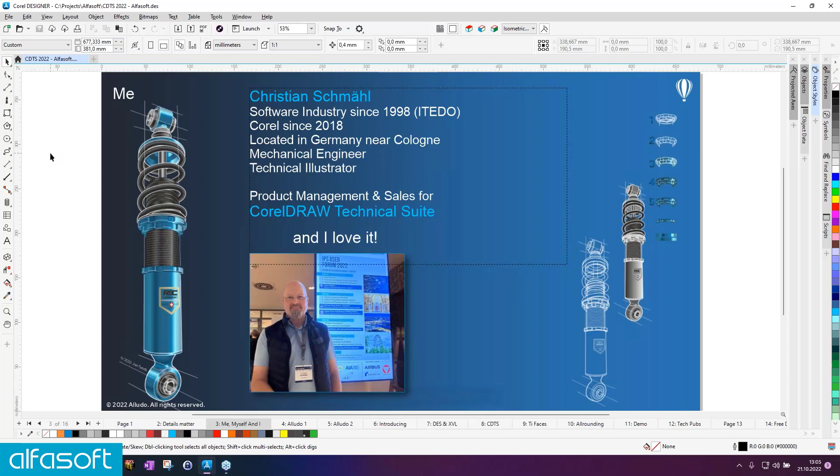As you can see, I love it, and it's really fun. That photo was taken, I think, last Monday. I just tonight came back from the IPS user conference, user forum in Vienna, where it was all about S1000D, where we are also very involved, and where specific requirements for illustrations are there. I had some really nice contacts, and I'm currently catching up with all those - it was really fruitful, and I'm looking forward to the next conference in this era.

First of all, before we go ahead, there might be some confusion. The company Corel is a wide word. People and users tend to say, I'm working with Corel - that's actually the company name. When you're working with Corel, you're actually working with Corel Draw or Corel Designer or whatever. That's a wide term. By the way, the name Corel is the abbreviation of Cowpland Research Laboratory, so it's an artificial combination.

Since we are revamping a lot of stuff, and there's a lot of movement in the company, we have new leaders and a lot of changes for the employees. They changed a lot to the even better - so we have a better work-life balance now and all that stuff. And what we figured out, since we have different brands in our company - we have WinZip, Parallels Desktop, and Mind Manager, and the CorelDraw family, which is the graphics.

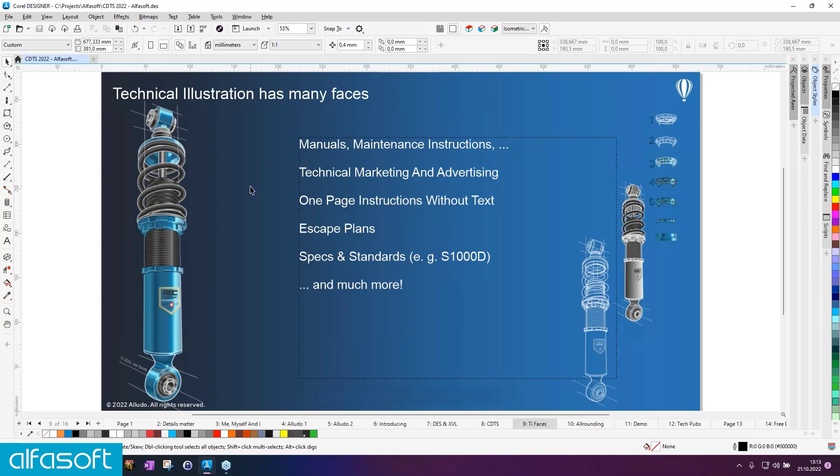And the idea behind the Technical Suite is that you have one solution package that enables you to create all of those illustrations, no matter if this is this color thing here or just a sign with an arrow on it or whatever. In essence, this means you have the concentration of all this technical communication in one package, and you don't have dozens of different formats where you need an application here, an application there. There's one package that gives you everything, and this is where it all comes together. That's our idea behind that.

So today the illustration situation is quite different than in the past. I think we all know that, I'm just having this here to be complete. In the past, we had technical writers doing all the text, and they went over to the technical illustrator and said, hey, I need one of those fancy illustrations because I want to visualize what I'm writing there. And then they created a combination of an illustration and the text, and that was the deal. So what's the situation today?

Today these technical illustrators, unfortunately, are fading away, and that led in the direction of the so-called all-rounder, which is actually the technical writer who has to do his illustrations by himself. And we like to give him the toolbox that enables him to make his life easier.

And this is again where it starts with CAD files and engineering data, so it's not up to the writer to create parallel perspective and all the stuff from scratch. So it's an easy entry, and it's a good thing.

So coming back now, grabbing CAD data is very easy here. You say 3D import, and then the XVL Studio, which was added to this graphic suite making it the technical suite, is started. This is your entrance into the 3D world.

Here it begins. Usually a majority of our customers, before they talk to us, tell us they have a process where they go over to the engineer and say, could you please take your CAD system and turn something like this and this, and then export it for me so I can take it from the server and work on it. That's nice, but it's actually time consuming for the engineer, and he cannot always immediately do that. After a while, he's probably quite annoyed doing that for you.

So the solution would be that you have your own CAD system, which is really overwhelming for somebody dealing with technical documentation. So here's the solution. This is simple, is powerful, and gives you the ability to grab the CAD data yourself and then convert it to your illustrations without annoying the engineer.

So if we open a file here, I have one file pre-converted, since sometimes when we import native CAD data, I don't know why, but when we are remote showing this, sometimes it takes longer than expected. So it's pre-converted. Actually, usually you have all these CAD formats here, and it depends what you're working with.

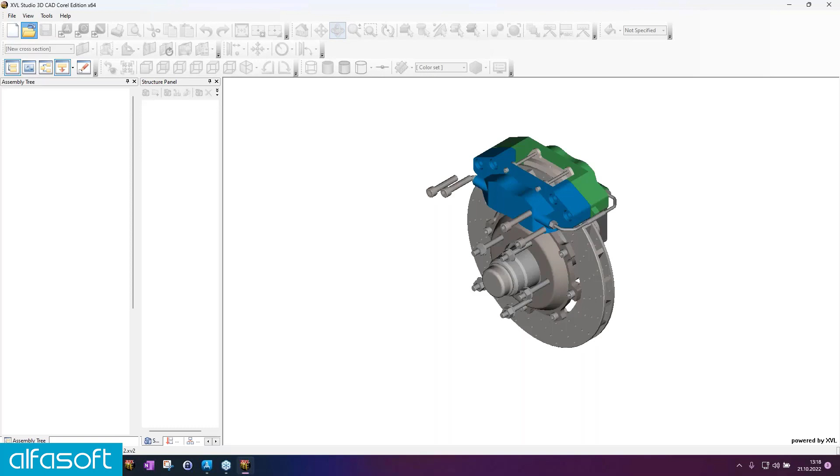Okay, so let's open this 3D file. Here it is, and I already worked a bit with it. For those who don't know, this solution has on the left an assembly structure that you can use to access the parts, which is very good when you know the names.

So you can say, okay, caliper, here it is, and then you can highlight this in your illustration. You can whirl the stuff around, just having a look here, examining it a little bit. It's just 3D data, and you can make some stuff invisible, visible, and so on. So you can examine and explore your data and figure out what you want to show in your illustration, where you've already written the text for.

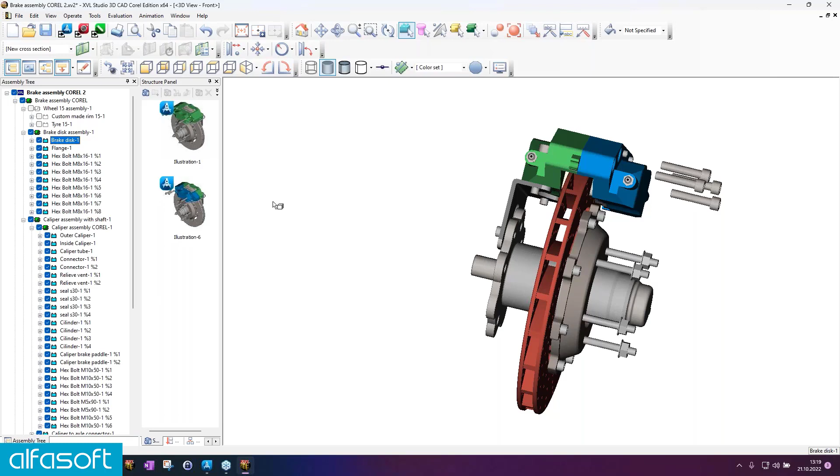If you want to go back to your initial view, you can double click the snapshot, which you can create whenever you want. So when you have different situations you want to write about in your documentation, you can create all these different snapshots and say, okay, this assembly procedure is like this and this, and then switch between these snapshots and just move them over.

Moving over, how does it look? So let's do what we've seen already, let's try to get a better view quality here. So we're doing this, what we have seen in the document already.

I have arranged everything like, okay, yeah, I want to show this situation here, and I want to move this over to my document in Designer. And there in Designer, I want to add some more things, like maybe a hand or a logo and stuff, everything I need to make this a high professional technical illustration.

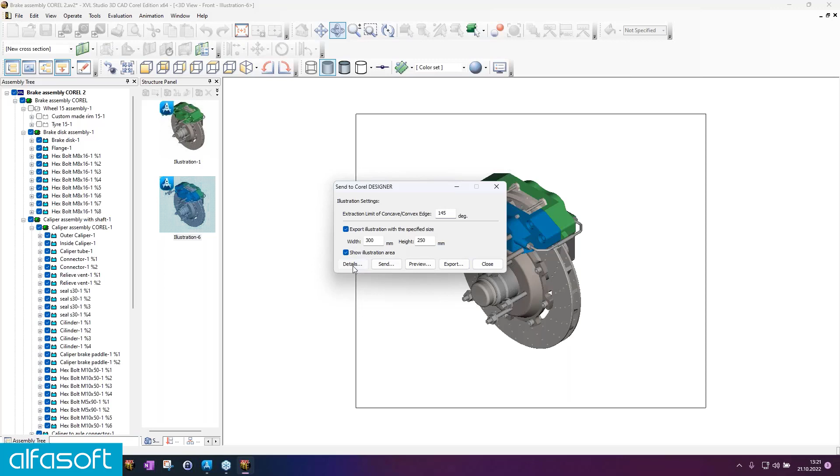The good thing, and this is the most interesting part, is you can enter your values for the thick and thin lines, and these are later created automatically in the color you want, or whatever, and then you can move this over. If you have repeating settings that you need, you can also save those settings, and then everything is set up as you like it, and that's it.

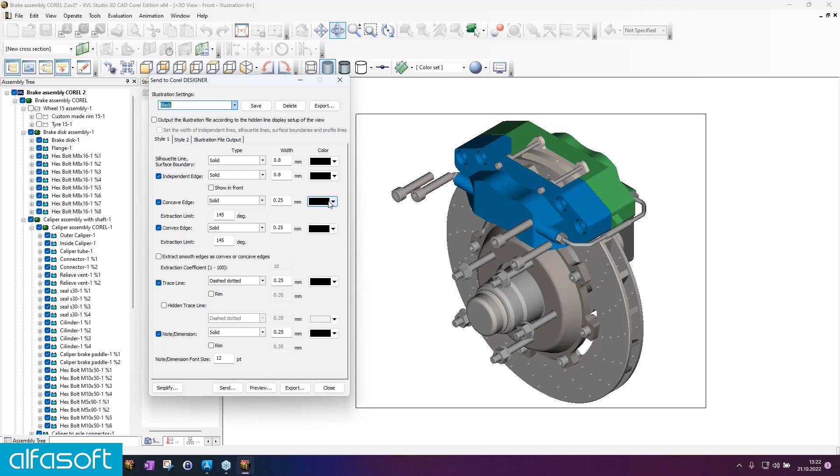There's a little frame around this where you can enter the frame dimensions. So when later in my document I have a box of 300 by 250 millimeters, you can adjust it here and move it over, and then it fits immediately without scaling. So let's do this, it's quite simple. You click off Send, and then all the magic happens in the background.

All the color is removed in this scenario here. Thick and thin lines are created, and later on we will see that it's moved over to Corel Designer, if everything works properly, I hope. Okay, so here we go.

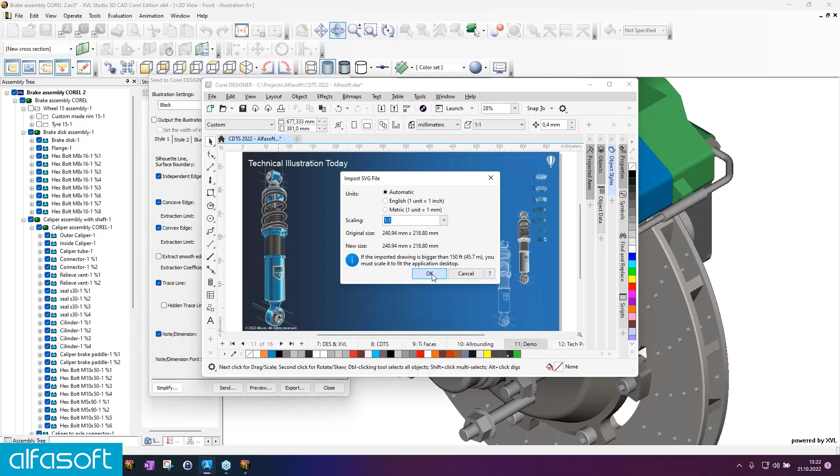The import process is done. You can see our intermediate format is SVG, not the worst. You can just click or drag a little box, and here we go. So that's in there, and here you can start further working on this, like say we are adding a thread.

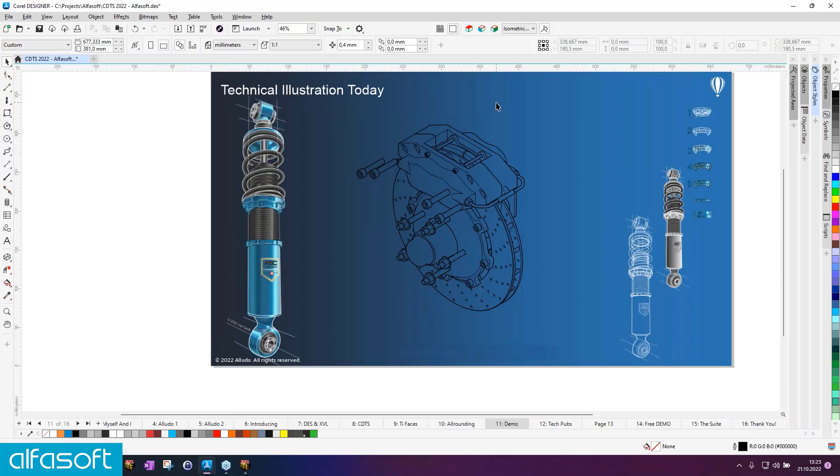For that, you can switch around here. If we go a little bit back, I can show you, I switch on the grid, and when I draw something, just as a little introduction, here's the magic rectangle. And if I now switch around here like this, I can switch the designer to parallel perspective, and I'm working on the colored blue arrow here. When I draw the same rectangle, it automatically fits to the parallel perspective.

The good thing is, when I enter dimensions here, it's not the distorted rectangle where you get the dimensions, it's the true dimensions. When I say I want this to be 40 by 40, then it's really 40 by 40. And this is the same as having this 40 by 40.

Okay, I'm doing this as well. So this is 40 by 40 in the flat dimensions, and this is in perspective. So you're working in perspective. You see this while I'm not in the flat perspective, there are different values because I'm not in the same system. If I switch it around where the system fits, then I have 40 by 40 again. So there's no need to sit and calculate what the distorted values are. Designer switches automatically, and that's the good stuff. So you have a graphics program, and when you need it, you switch to the perspective.

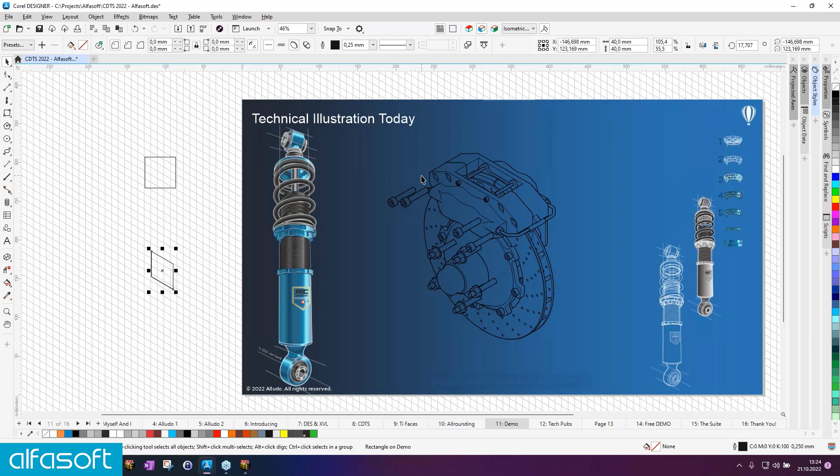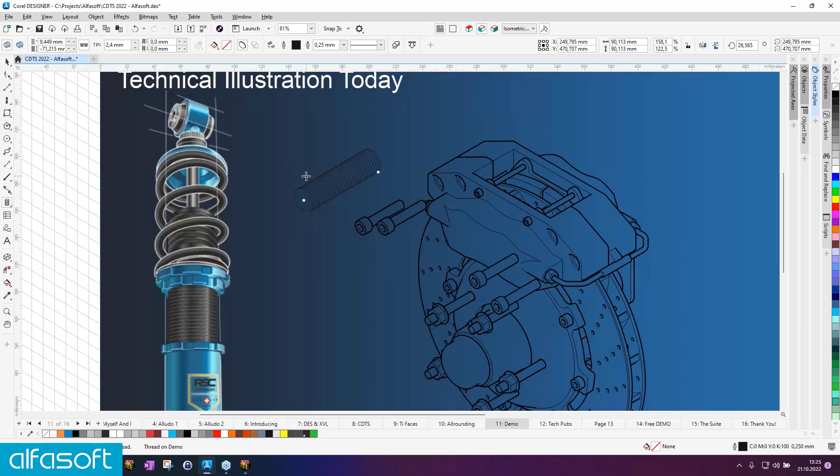Okay, so we are in this perspective now, and if I want, I can add something like a thread. Let's say we're doing it in that way, just so you see the thread. Okay, it's very fine, so we can adjust it here and so on. You can also enter the values of the length and stuff.

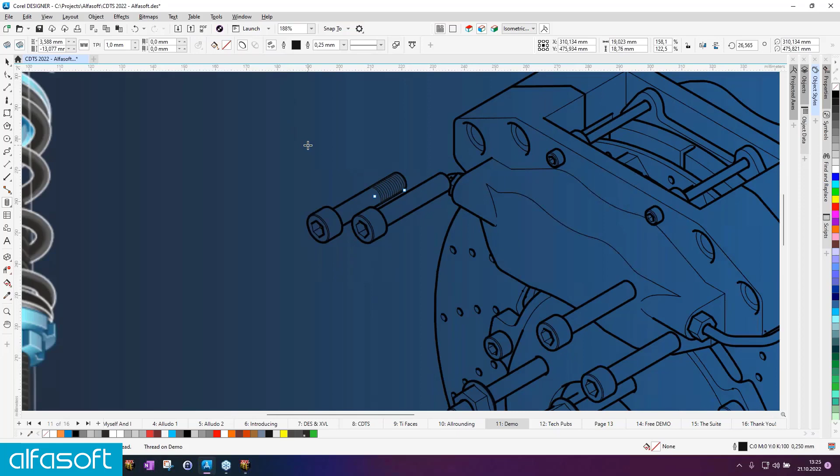But what we want to do now is apply it to this thread here. So we're taking the variant of that tool and say we want to go from here to here, and we just move it over. Then it's inside, and there are some ugly lines around that, so we switch them off. So that users can see this better, we make this bigger here, that value. And since this is a graphics program and not a CAD system, I can just, with Control D, duplicate this and put the same here as well. So it snaps there, and that's it.

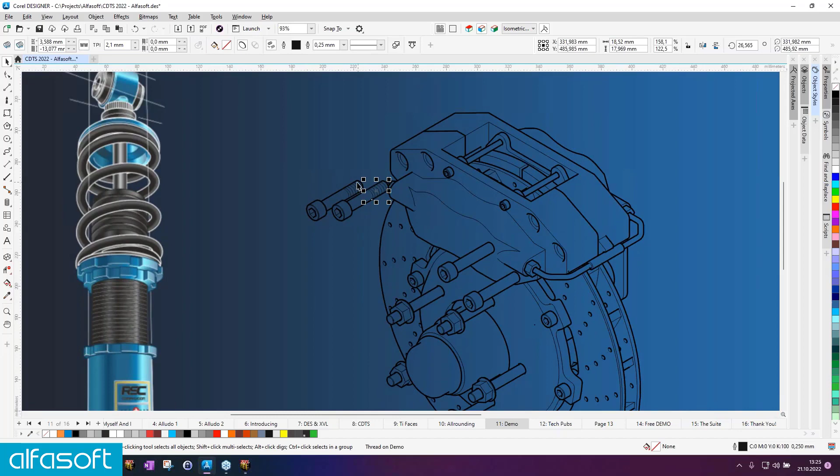Usually when you convert CAD data, details like this are missing, so you can mock this up a bit, so you can tell the people at home, look at this, that looks like a thread, and this is what you're supposed to find in the accessories box or whatever.

It's not only necessary to tweak the CAD data before you import it, it's also very important because you are responsible that your customers understand what you want to tell them. If you're causing a dangerous situation, then you might be in conflict with the law or whatever. So every documentation that you provide to your customers needs to be watertight in that meaning. It's not just drawing a picture, it's instruction, technical instruction, where you are held responsible.

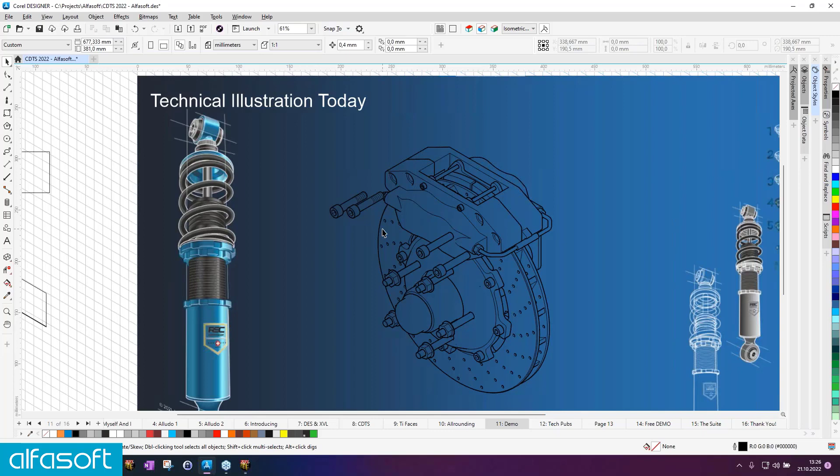But let's stay further with the all-rounder. Let's switch these things away, I'm scaling that and moving it aside. As I said, the all-rounder is not really an illustrator, so everything he or she can do in this other system to move the stuff over is better, since it's the so-called low-hanging fruit. And I would appreciate that myself if everything would be nice and easy.

So if we're going back to this 3D thing now, we see when we move this over, there is a new snapshot created. In this case, it's the same as this, but when we change something now and move a new version over, then this is reflected by a new snapshot as well. So let's do that.

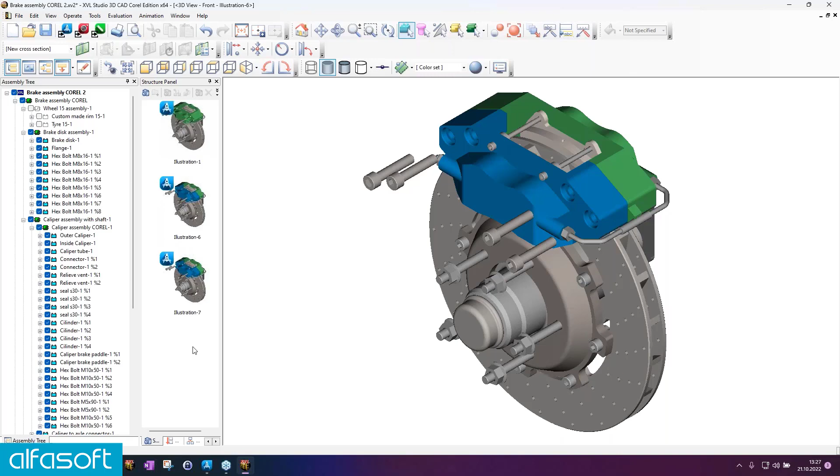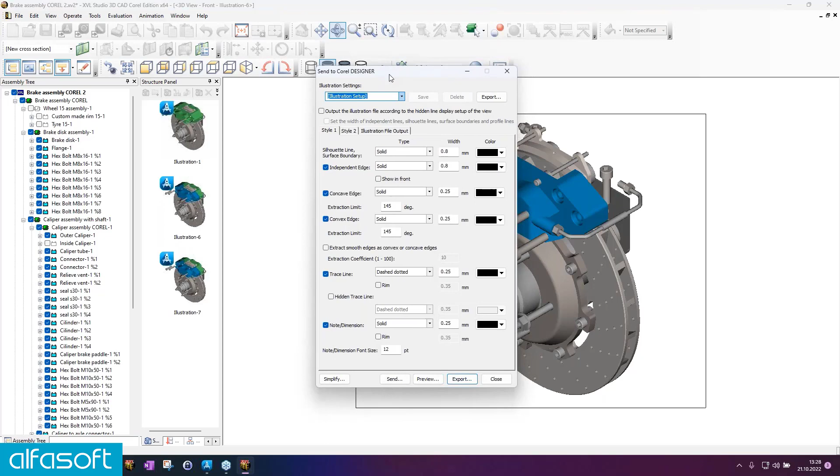We just make this piece invisible, and we say we just want to have this situation. Looks a little bit ugly, but it's just an example. Now we figured out that the blue background is a little bit counterproductive to the black lines. So what we're doing is move this over, and we switch the color of the lines to white. Since I prepared this here, I just switch to white, and then everything switches.

So when you're working on different projects and different pages, you can create settings here and save them for your needs. When you're working on project B, you take the illustration settings B, and when it's A, you take the ones of A, and you don't have to change all the stuff.

Now you might say a little bit of color doesn't need a profile, but when we see there are a lot of options which are very beneficial to you, then it's maybe helpful if I adjust it once, and then I'm good to go by picking this profile.

So another advantage would be if you're working for S1000D, then you can set up everything, the line weights and the thickness and so on, all on the S1000D spec requirements. You just say on top, I switch to S1000D, and then boom, everything is good.

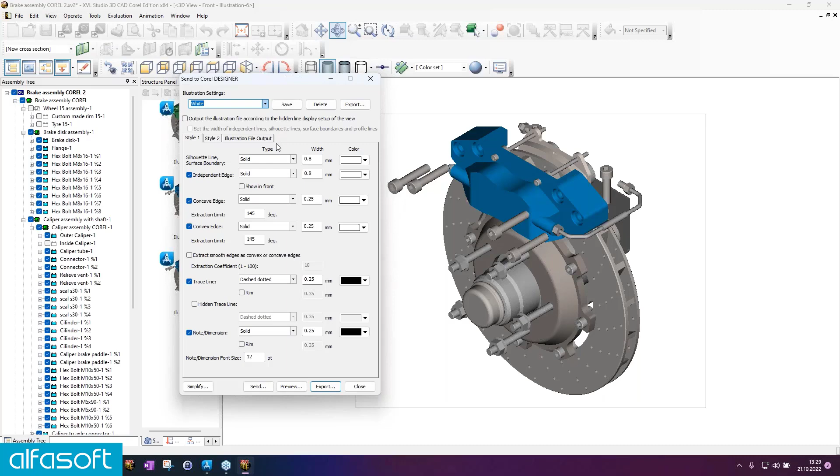So we are on the white thing now. I'm doing the same as before, pressing a button, and that's it. Waiting, having a sip of coffee. I think it's too short for a whole cigarette, but anyways. And then you move the stuff over.

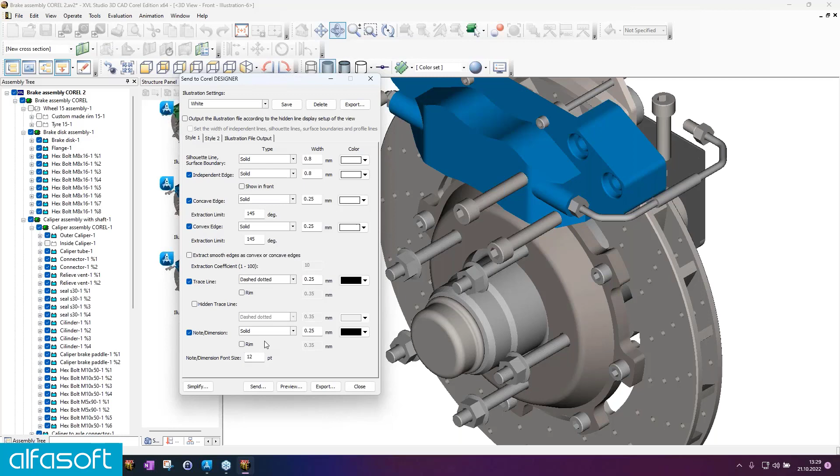Then you can continue working in Designer. This step to Designer is also very beneficial, we'll see this later. If you put everything in Designer and use it as a kind of repository, it's very beneficial, since from there you can go to different file formats when you want to post this on your website as SVG, or put it in a document.

In earlier times it was EPS. I don't know if people still use it, but there are tons of formats, like PNG. You can export everything out like you want, and it's up to you, instead of tinkering around with other tools.

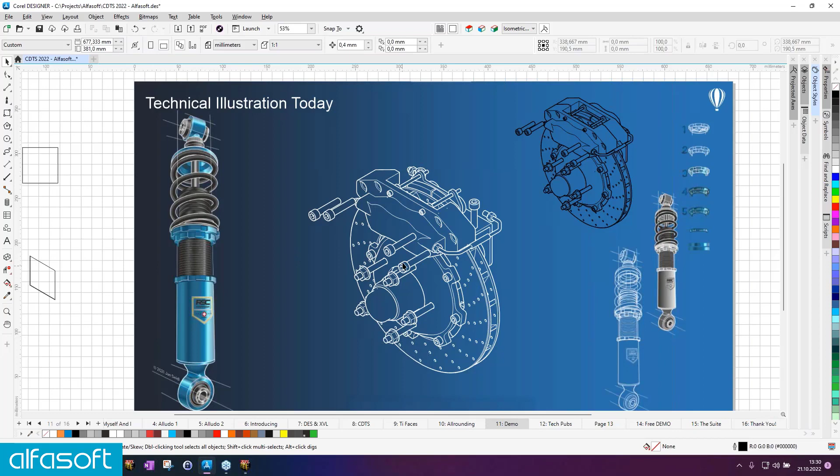I just wanted to say, here we see it black on white, but it's white on blue, so much better to see here. And we have a new variant that fits very well. It's still integrated in some kind with the CAD model.

So the first thing is, when we go back to the model, here's your new snapshot without the blue caliper. Then we see that on this item, you see metadata attached. There's a lot of information on it, but the most interesting part is this, there's a name, a part number, and many other types of information.

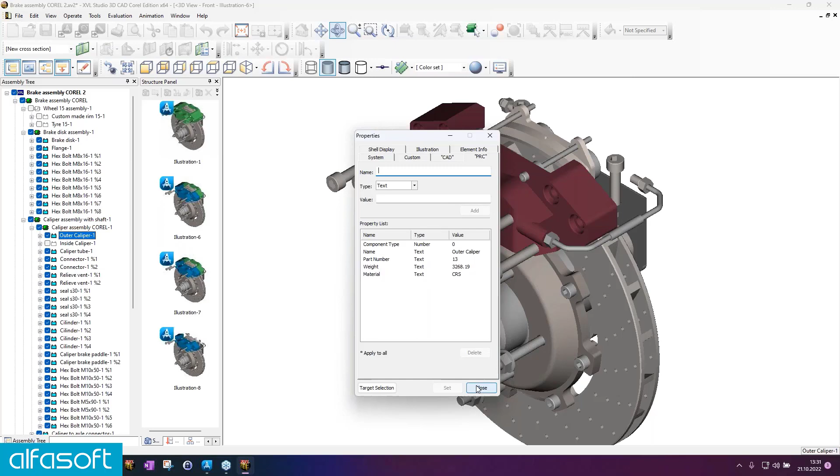If we go to Designer, we'll later on see that this information is still on these elements. Why do we need that? It's totally clear, you don't have to pick it from a list or copy and paste or rewrite it, so you don't make any errors. I'll show you where this is very beneficial.

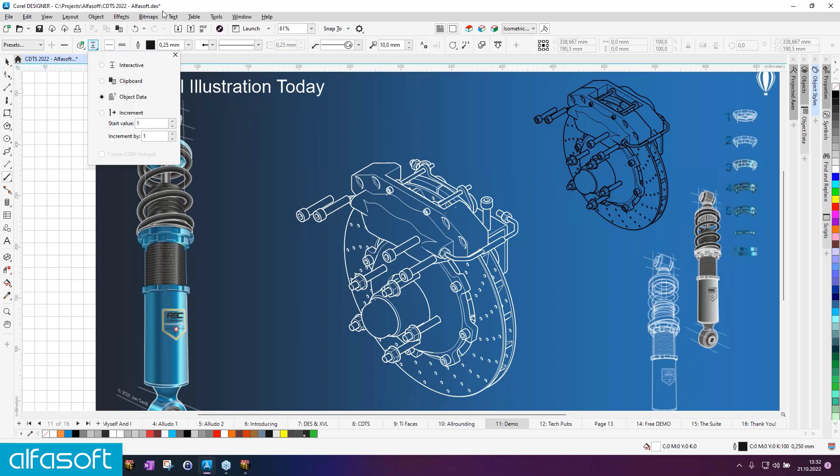We have an automatic callout tool here in Designer. With that, you can create very fancy callouts. We can set those to object data, which is actually the metadata that comes from the CAD system. If we click on this caliper, I get offered, let me pull this a little bit bigger, a list with the metadata that we pulled from the CAD system.

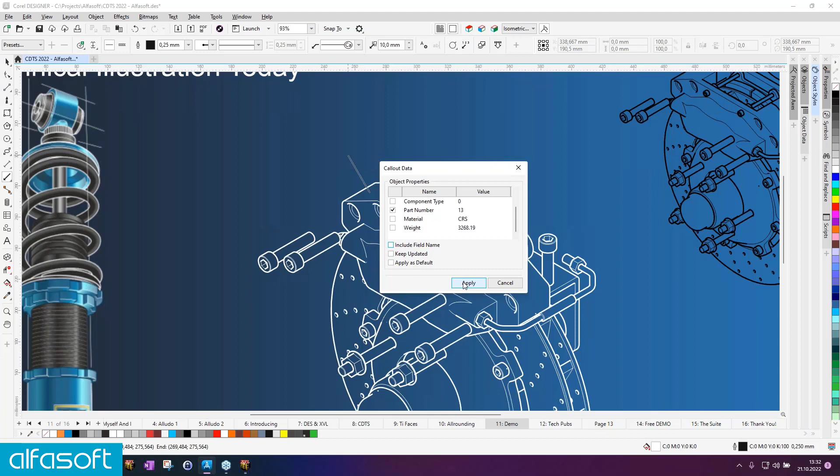And I can pick now, say okay, part number. If I want to include the name field, I can do this. I switch this off and say apply, and then I have this number 13 as a callout sticking on my caliper. Can do the same here, we have the number 28, and that's it, and then we go ahead with this.

So you don't have to worry what to enter there. Of course it depends if the data is in the CAD system, but if it's in there, you can leverage it and feel free to work with it. It's very easy, and you have seen there's no fake and nothing, I just imported it and we're good to go.

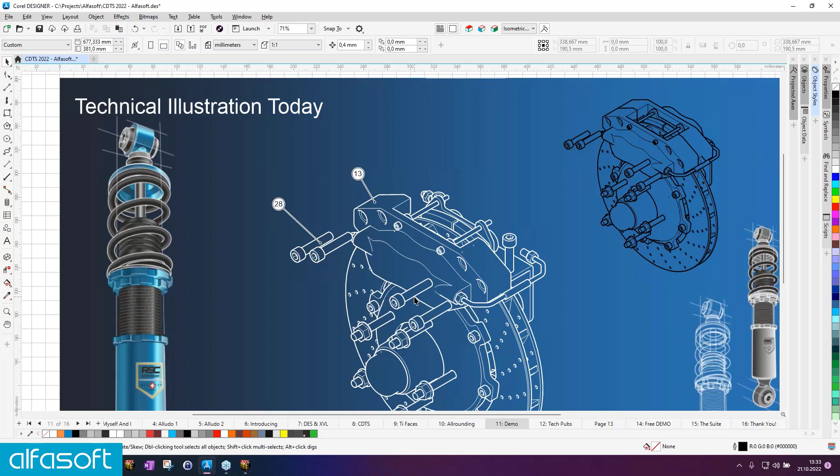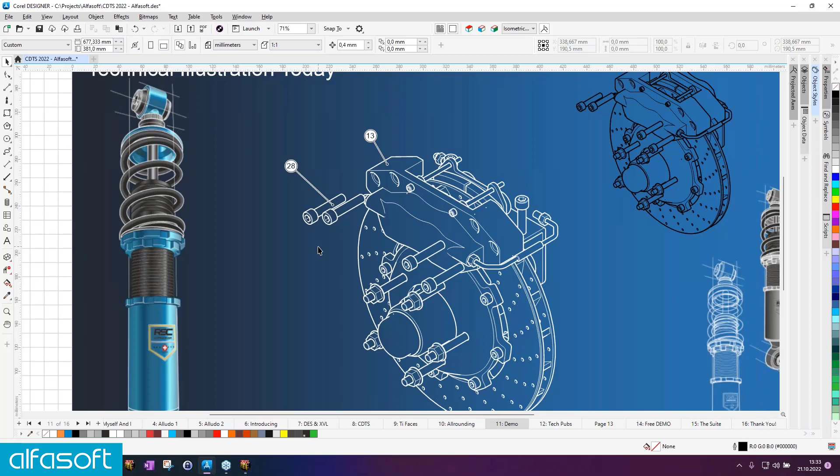If you now see that something is missing in the CAD file, then you are challenged to add this yourself. And when there is no additional CAD data for a part that is missing, you have the ability to create the stuff yourself, using our support for thick and thin lines when you draw something yourself.

I'm opening a so-called Docker. We have all the function bundles in so-called Dockers. I can open this Projected Axes Docker, for example, and here we can work with these little settings as well. So it's very obvious.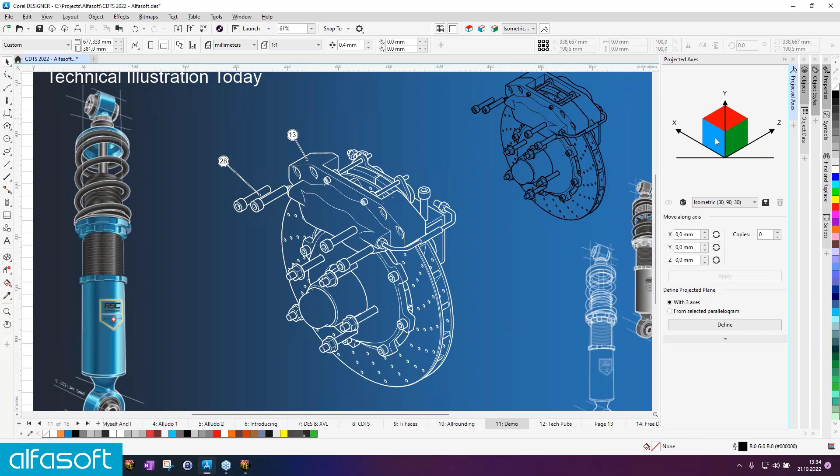If I click on this blue surface here, you see that it activates there as well. It's actually redundant, but here we have some additional functionality. When I click here, it switches as well. Let's look at this rectangle. If I want to draw the rectangle as the lid, for example, I can activate the red surface and draw it there. There are also shortcuts I can switch around, but it's just for explanation here.

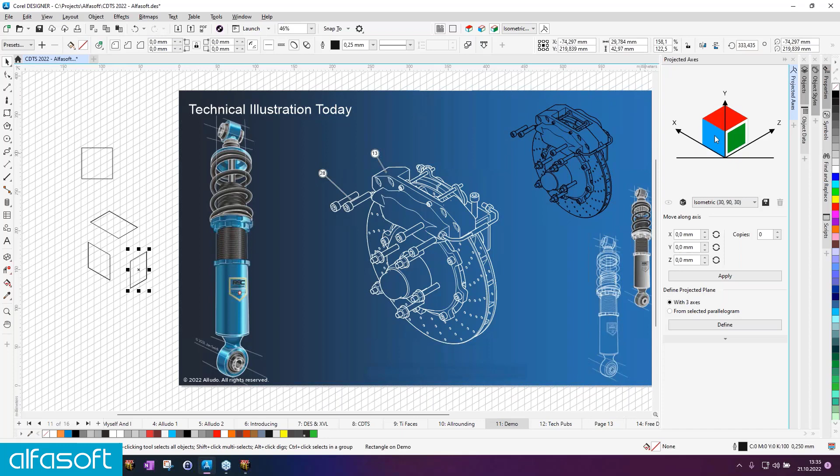So coming back to our missing part, let's say there's a little bolt or whatever I want to illustrate. I can create this bolt starting with an ellipse. I have the thick and thin lines automatically, and I can switch this off and on. I can say the depth of this thing shall be, let's say, 22.

It's good, then I can use the same button twice, and a copy I send it to back. Let's see, did it work? Okay, little delay, so I created three. I delete one of those.

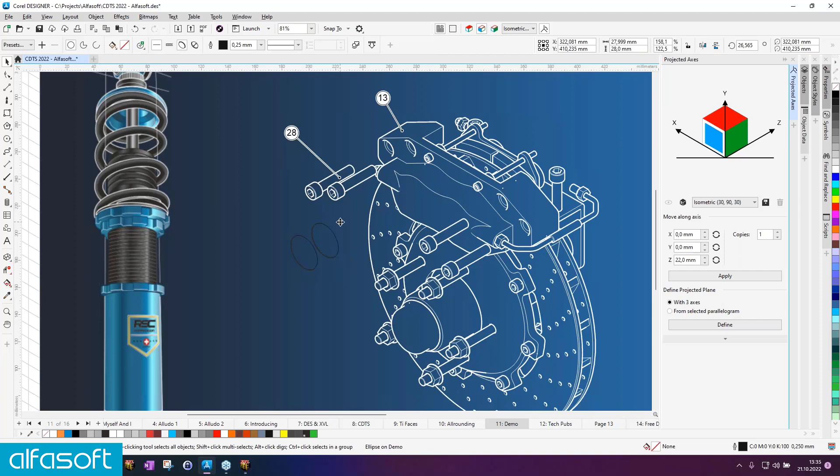It's the presenting effect. Thick and thin lines here, I can switch the thick and thin lines. I make this a little bit bigger so you can see that. I can add a tangent, like pull it out like chewing gum, add it here. There's a keyboard combination that lets me switch this to be thick, and I can switch this also to be thick.

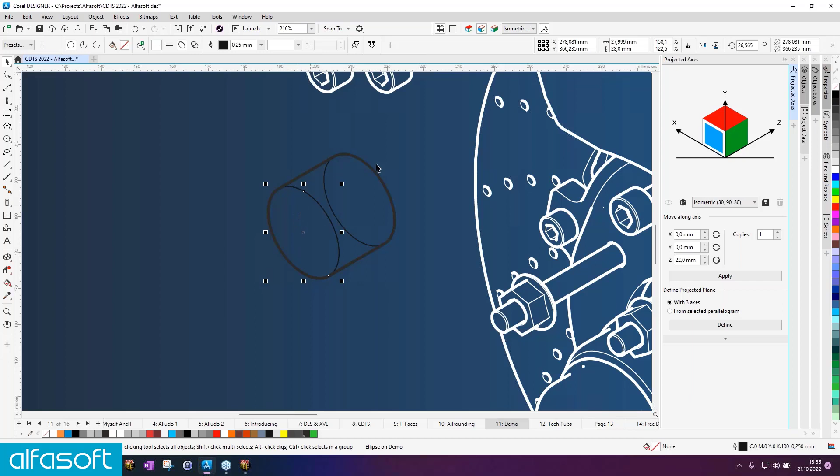Maybe on the center here we add a little drill hole, Control D duplicates it. I want this to be whatever, I just drag it down like that. Switching it around, lined, okay. And here we need to delete something. There's an intelligent delete, a virtual segment delete tool. I just touch the superfluous stuff and that's it.

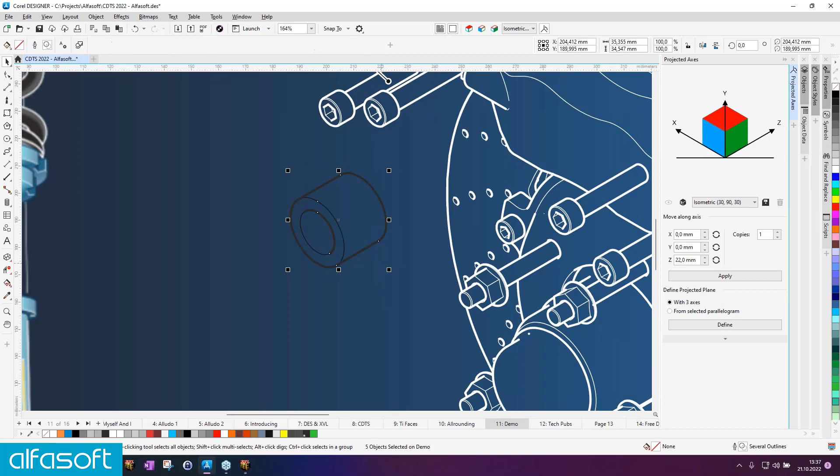Okay, the stuff is illustrated and I make this a group, Control G, and here we go. Now you might say, okay, this is white and this is black and I don't really like this.

So the thick and thin lines are stored in so-called object styles. I have a lot of object styles here, but the ones we are talking about are the thick line and the thin line. I deactivate this. I select the thick line.

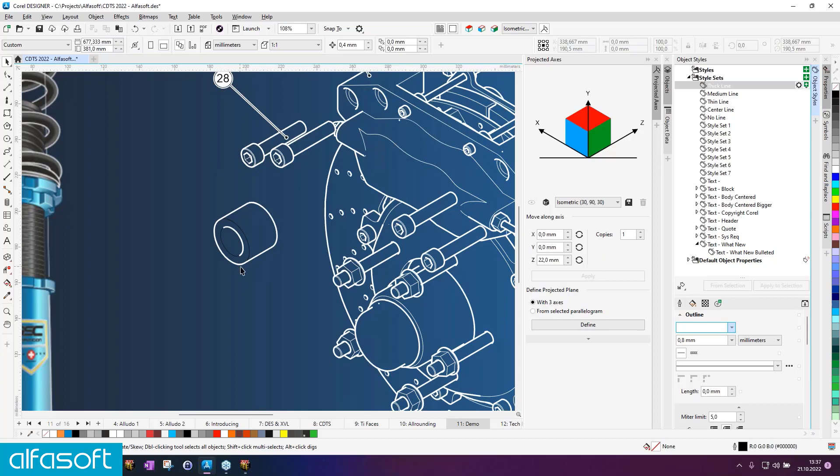If we don't have any effect here, then I can change it on the central place, and you see it's all actually independent elements. It's just a group, but it's independent still. When I change this on the central place, it changes in the whole illustration, and that's the very nice thing.

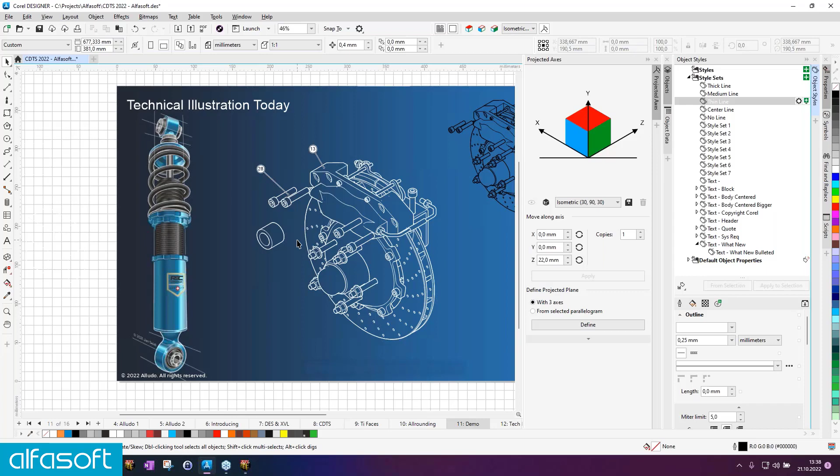So I can start working on that, and I can even adjust the line thicknesses so they fit. You see now you have created something without being an engineer for your illustration, and you can work with it right away. That fills the gap for stuff which is not in CAD. That happens, or maybe there's something that looks so clunky when you convert it over that you decide you want to recreate this or clean this up. Then you have all the possibilities here.

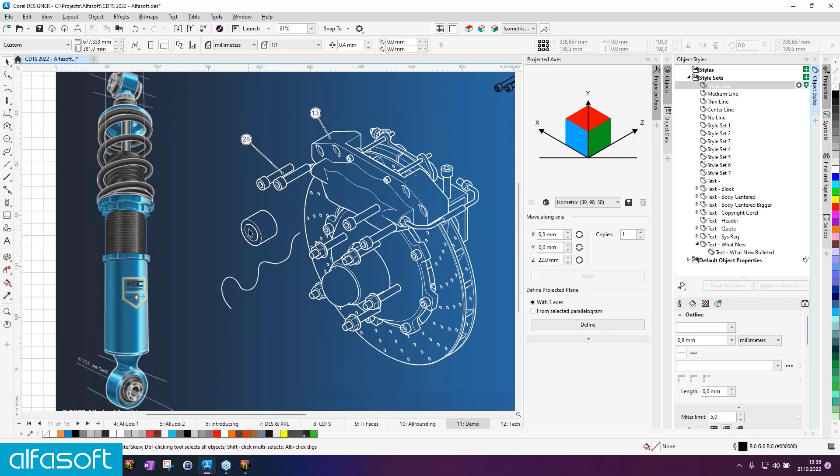And even if there is something like a plain line that you want to draw in freehand because you need it, then it's much easier than creating something like this from CAD, or it's maybe nearly impossible. So this is the process, the area where the CorelDRAW Technical Suite is actually living. Just taking something from CAD and converting it or making a picture of this might not be enough. And having the ability to draw something in perspective might also not be enough.

The combination of both is what makes this a suite and gives you the ability to fulfill all your tasks. You can also create libraries with bolts, specific bolts that you have, and incorporate all this stuff and whatever you want. So this is actually the epicenter of your graphics.

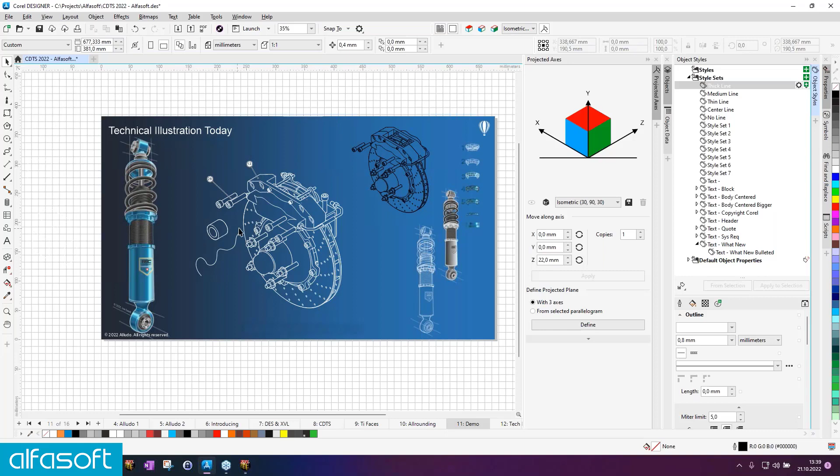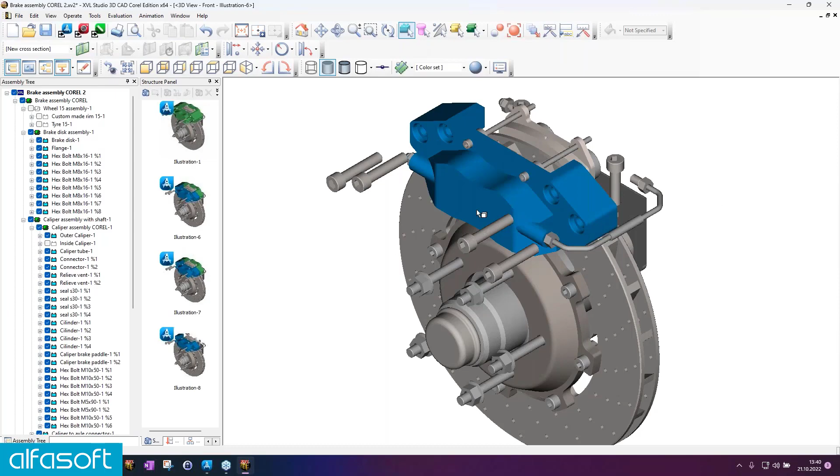Okay, so just one more thing to show you the power of these settings we created. So I move this a little bit over. Let's say there's another thing. If you want to add some color, then you can do this as well. We're just moving this over again.

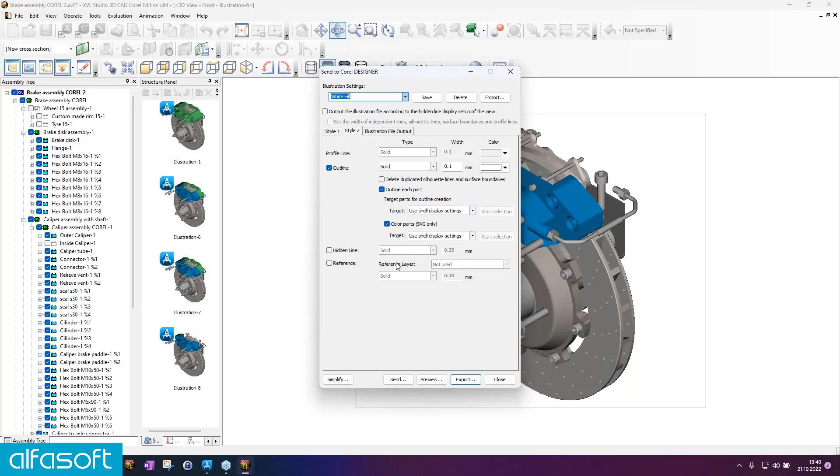I enabled a setting just now, White Fill. What I enabled there is just a saved setting, so you can create outline parts. When you tell a part before that it shall have color and the color shall survive on the way to Designer, you just click these three boxes, and then we send this over.

Let's see what happens. It's always a surprise because we're live, so let's see.

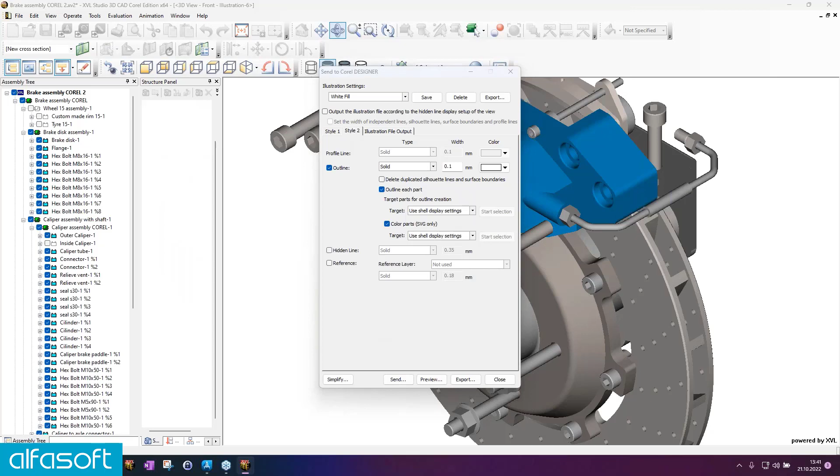Sometimes it's very beneficial to have a drawing in line art, and then you just highlight one part, the part of interest, with a color. Some take red, some take gray, and you say, okay, this is the caliper, and give it context with the illustration lines around it.

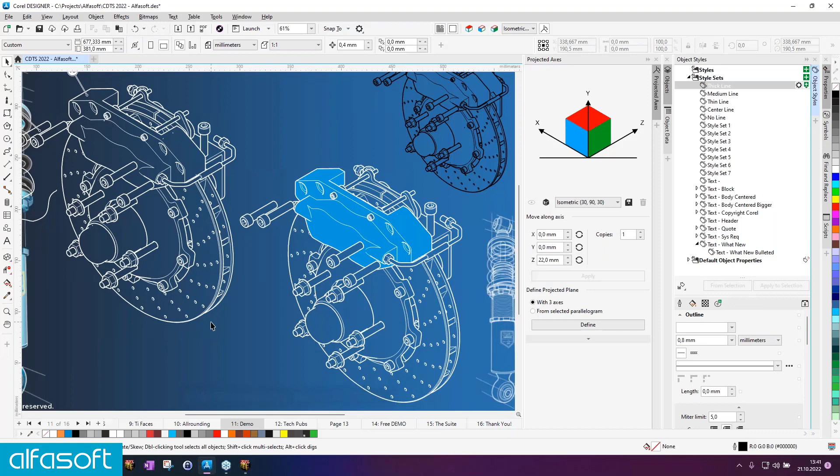So we are entering it here, and it worked. What you can see is you can grab many information types from the CAD system, and now we have the color in there, and we can work with this.

You can also make this a light gray so it goes more to the background. Say in the text, the area of interest is the blue caliper, and please don't put any oil or smear or whatever on it, otherwise it will kill you immediately when you try to use the brakes.

So that shall give you a view on what the abilities are just by converting the stuff from CAD using the right tool and the right options. This is a very flexible way.

The amount of options you have on top here in Designer is nearly endless, and you can create all these illustrations yourself. As evidence, when you go to the website and go to the technical suite, the vast majority of all illustrations you see there is really done by me, and this is my way to show I'm advertising for a product where I'm able by myself to create things with that.

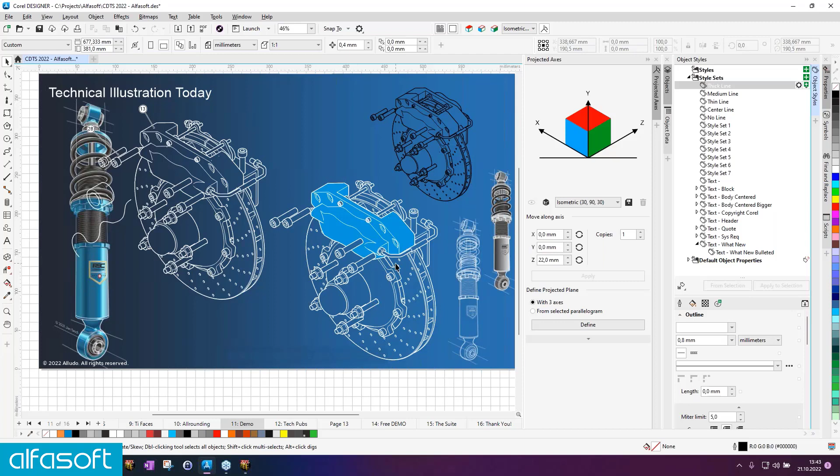Okay, so let's minimize these dockers here and switch off the grid, that disturbs. Let's go back to some theory. This is the suite thought behind this.

What I said initially, having a solution to create a technical illustration is not just drawing a bolt and putting a number on it and saying this is bolt number 5. There's a lot more stuff like marketing brochures, even sign plotting or engraving when you have products which need to be engraved and stuff.

There's also one thing nobody talks about, which is very interesting: screenshots of displays and software UI. Like you have something like a truck and there's a display in there where you operate a crane on the back, and then you need to explain to the operators how to use this and what they see in this little display.

So this is a matter of screenshots and all that stuff, and you can put all these things with the technical suite tools, with the capture tool in this case, into these files, and then export it to whatever format you need.

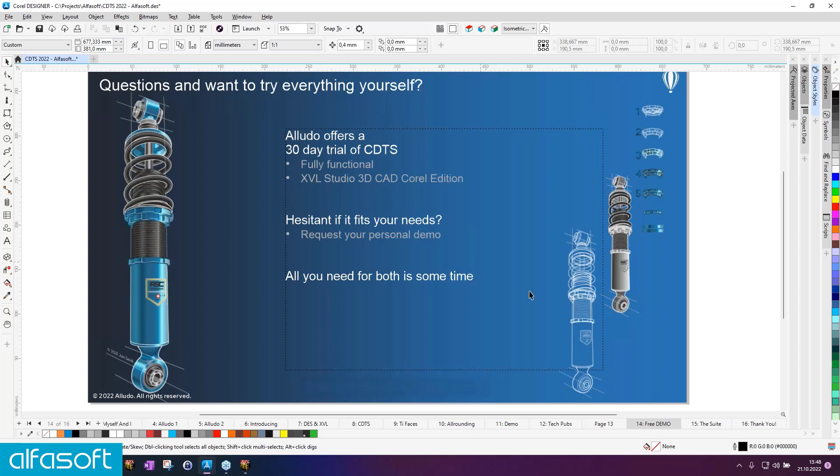Okay, so that's the end, and we complete this with a load of information about import and export formats, and this is the idea behind that.

So you can actually create TIFF files, import them. You can read AutoCAD drawings, which is very beneficial when you have DXF, DWG, and all these things. I think it doesn't make sense to go through all of this, but for those of you working in the S1000D industry, like aerospace and defense, the computer graphics meta files we create are fully standard compliant. You can open your existing CGM files, export them, add object information, and there's absolutely nothing missing in that area.

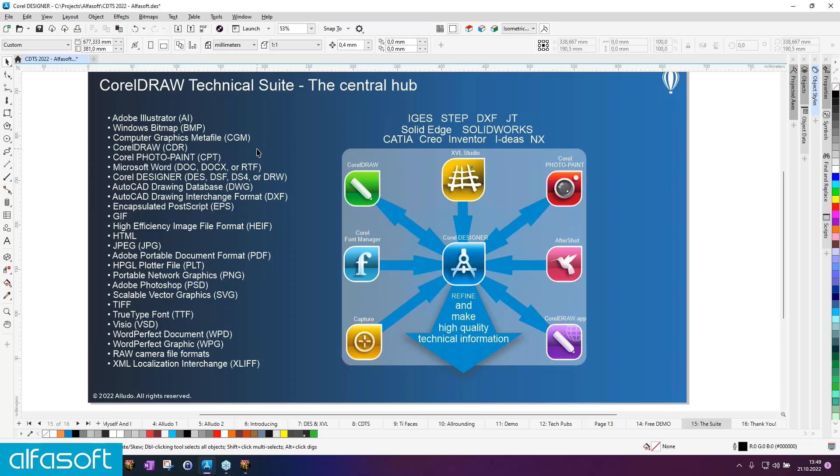Thank you, and I hope you got some information that's interesting for you. As I said, if you need further information, contact your local sales guys, and if they need to pull me in, they will contact me anyway, and then we can see how I can support you all. So this is my end, and I hope somebody takes over now.

The voice from nowhere comes in and says, thank you, Christian, for that. So that would be my job, right? So we have a couple of quick questions if you have time for them.

One question: I have my own CAD data and I want it tested by you, can you do this? I can do this when you are able to send it to me without any confidentiality issues. It can be some stupid test data that doesn't have any meaning but represents what this is technically. Then we can exchange this. Pay attention that it's not too large, that doesn't make sense. A small model, and then I can have a look and give you a little report on what is good and what is hopefully not bad.